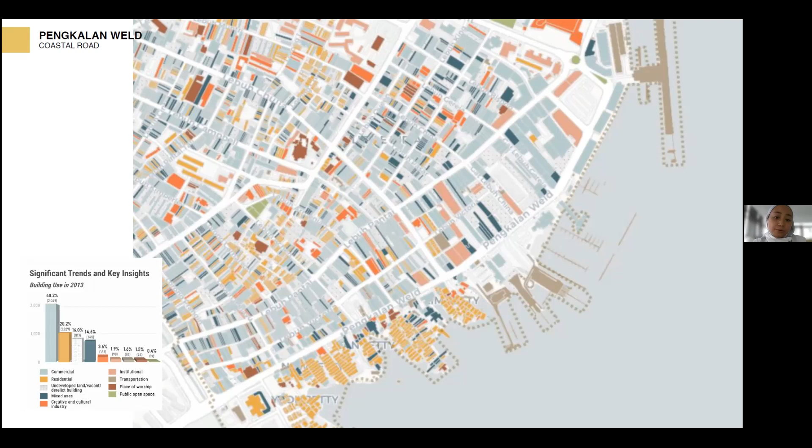From this understanding, you have to know the sort of activities that will be around this road or along this road. With that, you can understand the dynamics of the site, who are the people that will mostly be walking or engaging with the site, the road, or the environment.

Some of my observations through Google Street. When I look at this coastal roadway, it's a 2-lane road and quite wide. The cars are usually fast, so we can say it's actually a car-dominated area where the pedestrian walkway is not very well treated. There are pedestrian walkways, but they're not conducive, safe, or even shaded by trees to make it comfortable for people to walk.

This is what's interesting at the public building of Suruhanjaya Pelabuhan Pulau Pinang - there's street art where they've put this all over the town. It's interesting, but it's just an attraction, not really something you can engage with. I mean, you can read it, but it's not really engageable. So that's some of the character observation I've seen through this road.

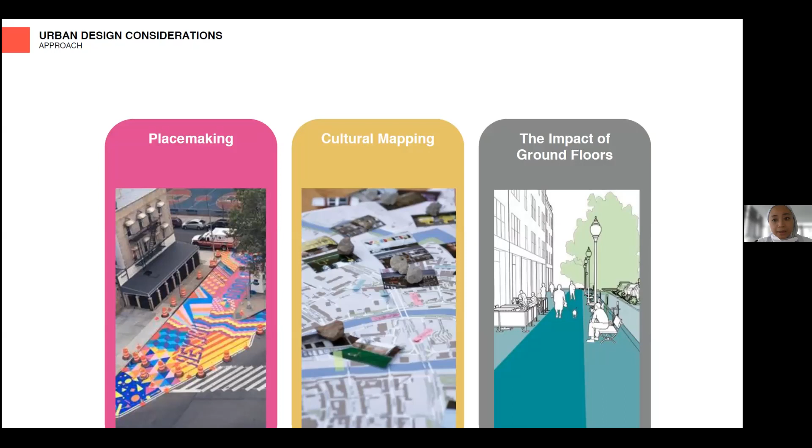For my presentation, I'll be talking about three things: placemaking, cultural mapping, and the impact of ground floors. For placemaking, we need to ensure six principles.

The first is ease of movement, so people can easily access the placemaking area, whether it's a shop, a kiosk, or an art statue - it should be accessible and safe. Then there's character - you need to understand the site in order to implement what sort of character can be part of this particular placemaking element.

Then there's legibility - it needs to be clear why the purpose of being there, so people know this placemaking is here. And then diversity is quite important, so you can capture a lot of diverse kinds of people that go there - cultural as well as inclusive.

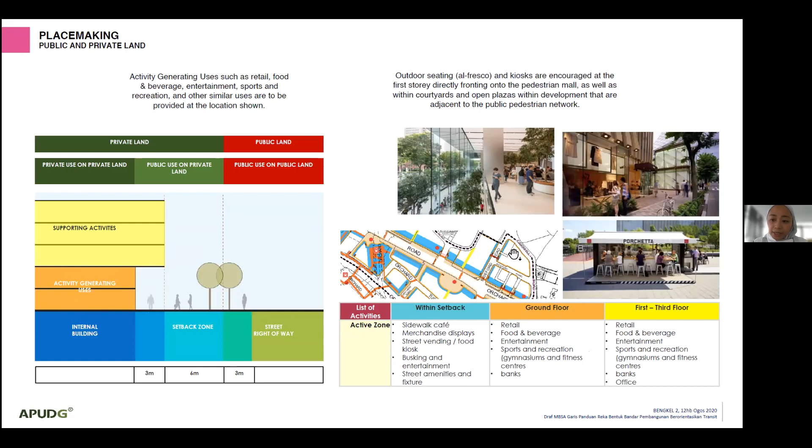This is just another form of saying that these orange demarcations are where the public mostly lingers, and this is what we call activity generating uses to create placemaking.

Another example is in Shah Alam - they create public area, but this is just their easy approach, or not expensive but cheap approach. Sometimes they just want to introduce to the public that they want to make this a public space, so they just want to put cheaper elements first.

We also have to consider the pandemic or endemic times with COVID. With placemaking, you can't really have spaces that can trigger the virus. In Jalan Alor, for example, they spaced the tables out and had divisions between shops. The activity still needs to happen because it's just our lifestyle and culture, however we need to take safety precautions.

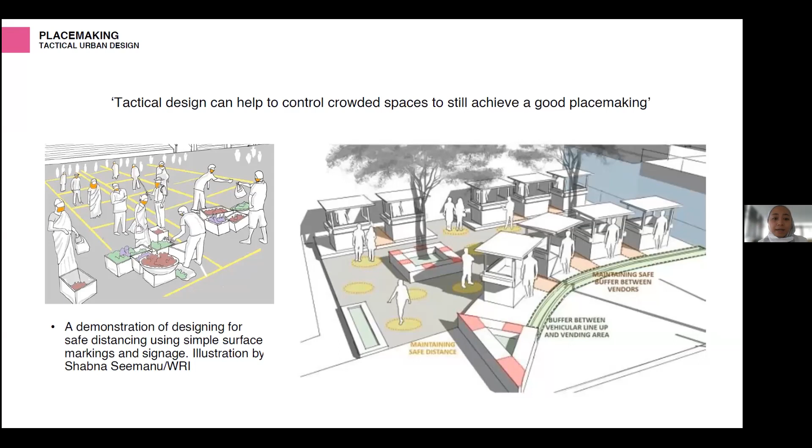For example, something like this, which lets people still socialize but being distanced. And this is an interesting quote: placemaking could start from shared spaces in an office building to a back lane, using art and culture to attract people to have a sense of belonging or a place to relate to.

This is an interesting case study I just did research on in Georgetown itself, Jalan Magazine and Jalan Gurdwara. The municipal city council of Georgetown has actually revitalized a 135-meter long back lane between Jalan Magazine and Jalan Gurdwara.

When they revitalized the back lane, they created different spots of placemaking: areas with green turf on the floor, timber decking with some plants, lights on the ceiling, and it also works as a cycling lane.

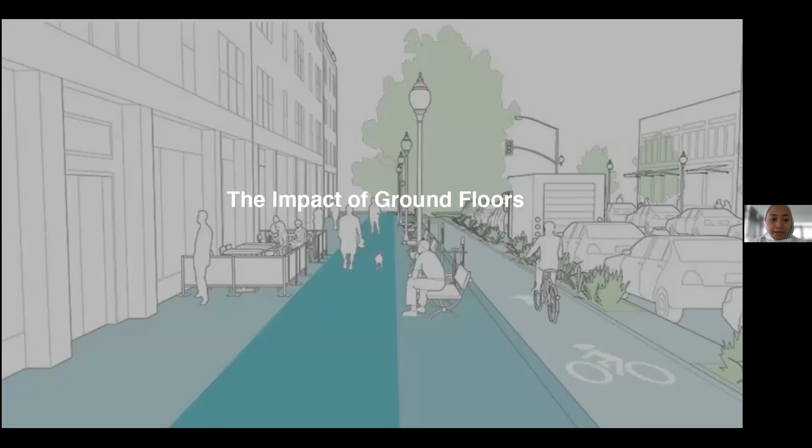These are some pictures that I feel can be part of the culture of Georgetown, where there is a multi-diverse race as well as the built environment that is attractive, combining modern society with the colonial era. The third and last theme I'd like to talk about is the impact of ground floors.

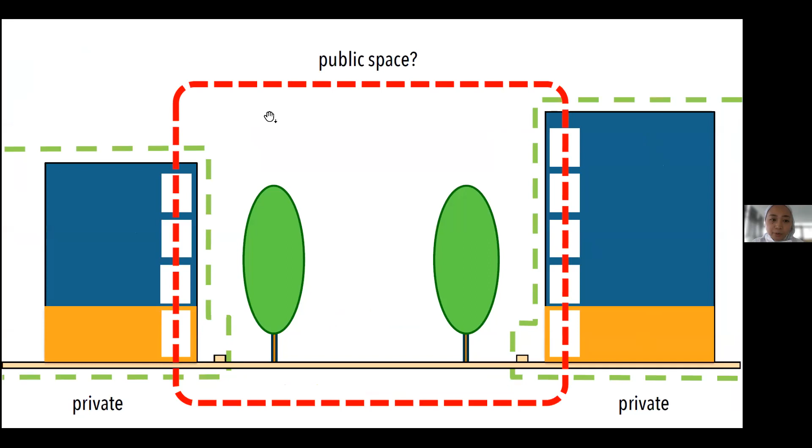So what is a public space, right? When we talk about public space, is it the plaza between the buildings, or is it the whole thing including the frontage of the building facing the plaza?

I think the public space should be the city at eye level, at human scale, where people can access, see, engage, smell or taste. These are the important factors we need to look at.

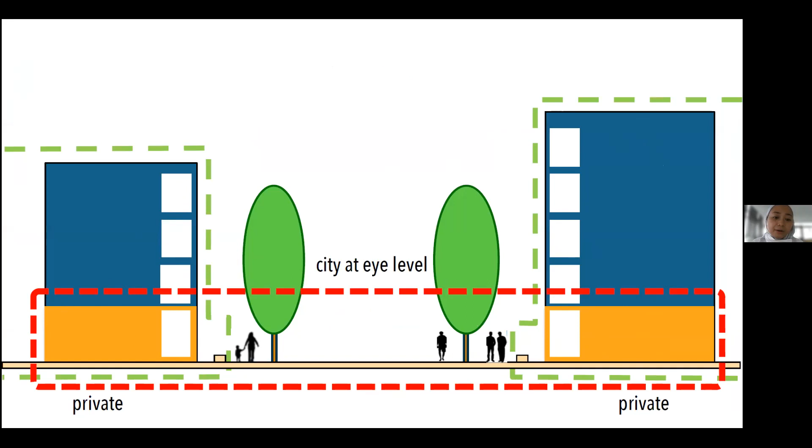When we look at the effective viewing distances, at the 1 meter distance from the shop, this is where the person feels more attracted, at the ground floor. If the person is beyond 1 meter, at 5, 14 and 23 meters, they experience different levels of building heights.

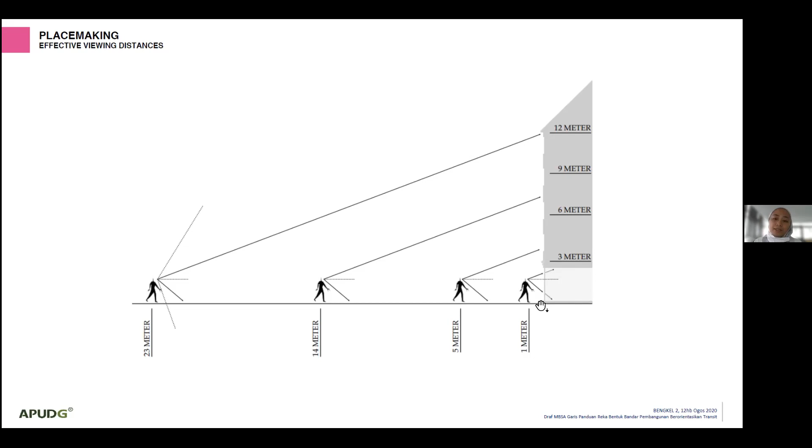But I think in this course, I'm not sure if I'm right, but this is where we want to look at, which is 1 meter, trying to solve this sort of facade. How can it be more attractive and purposeful to the public to enter?

Then it goes to the treatment of the windows. Are the windows giving full advantage to what people or the public can see inside? Even if it's just a straight wall, is it transparent? Is it a full height window or not? Because the window is actually a very important element.

People are attracted to what they want to see and what's inside. According to architect Jan Gehl, above 50% of the building front of the ground floor should be transparent, meaning windows or open space. So that's something we should consider.

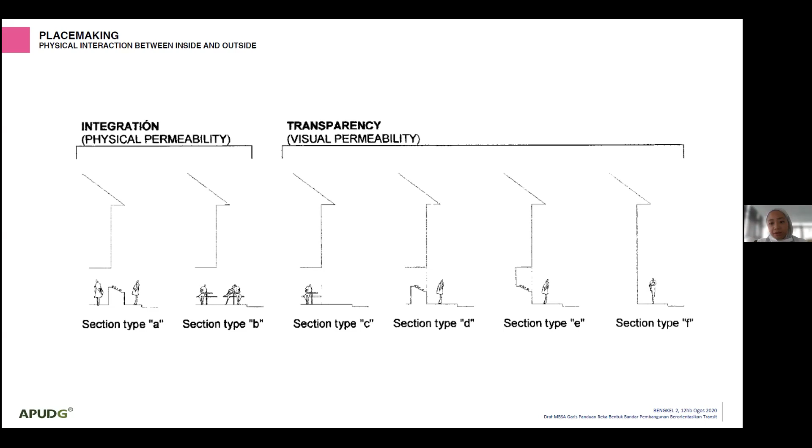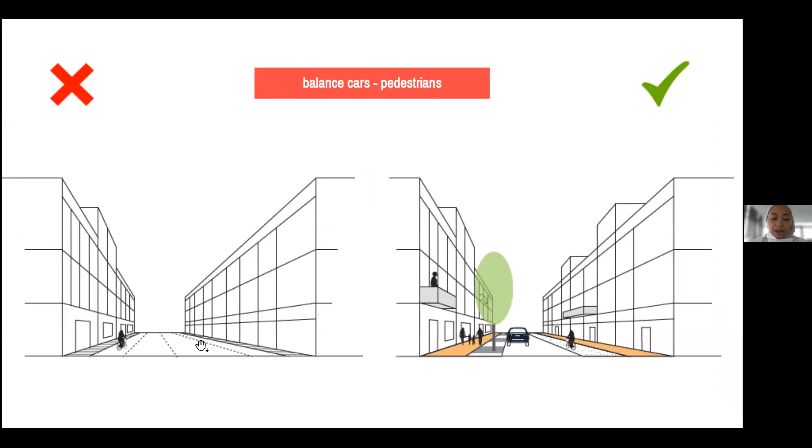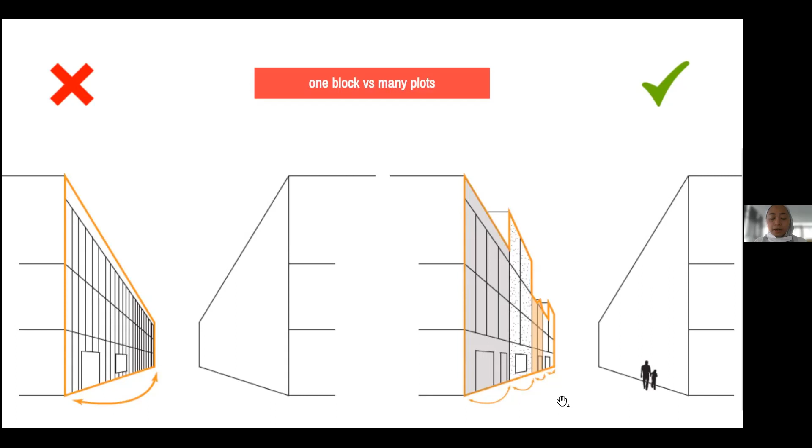And the dynamics of the building height also plays an important role to make people interested to be in that environment. And tree canopies are very important to create that comfortable temperature.

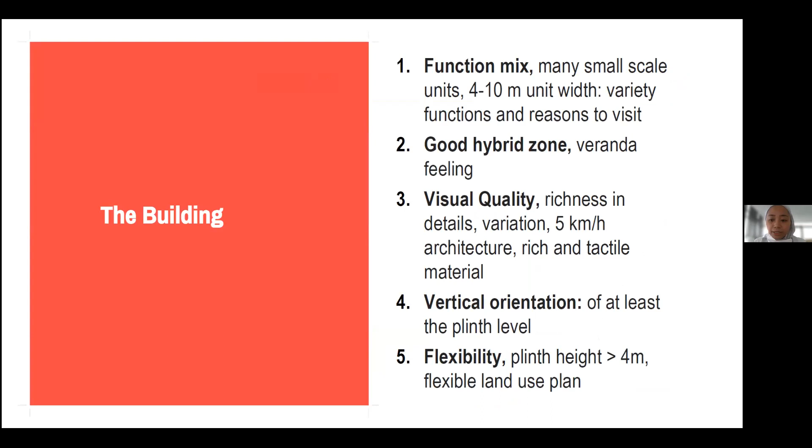As for the building itself, the function mix, many small scale units are better than having a big scale unit. A good hybrid zone, veranda feeling, visual quality, richness in details, vertical orientation of at least the plinth level, and flexibility.

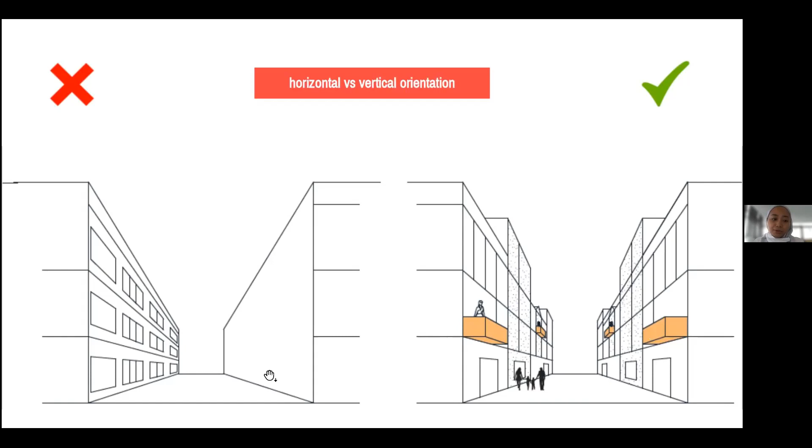So when we look at this building compared to this one, when we have these protrusions out, people would probably want to interact, or it just feels safer to walk when you have people watching, as opposed to walking by a blank wall with nobody looking out.

And then, one entrance versus many units. This building has only one entrance, but this building has many entrances, and it just gives more activities and more reason to walk.

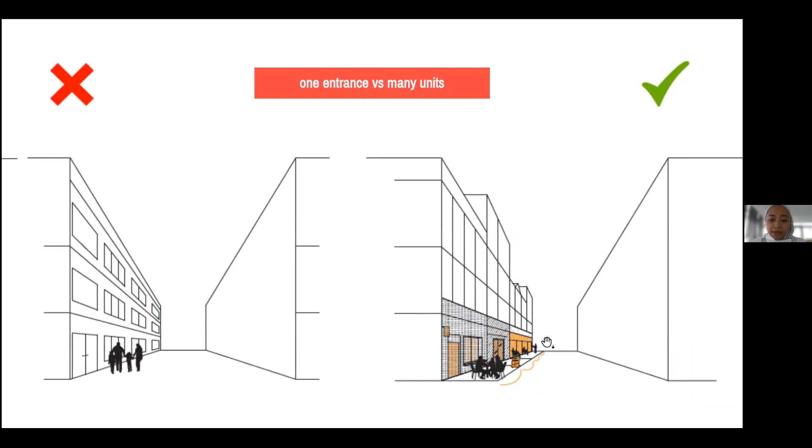As I mentioned, this is blank, and it's a very hostile environment. And this one, even though it's residential, gives off a very interesting environment.

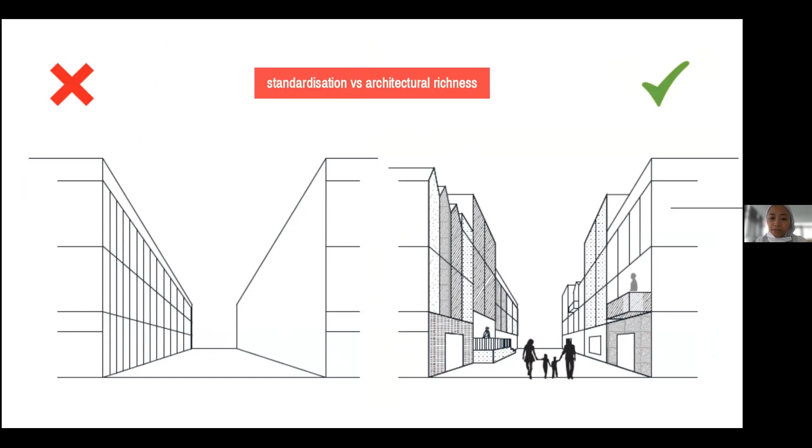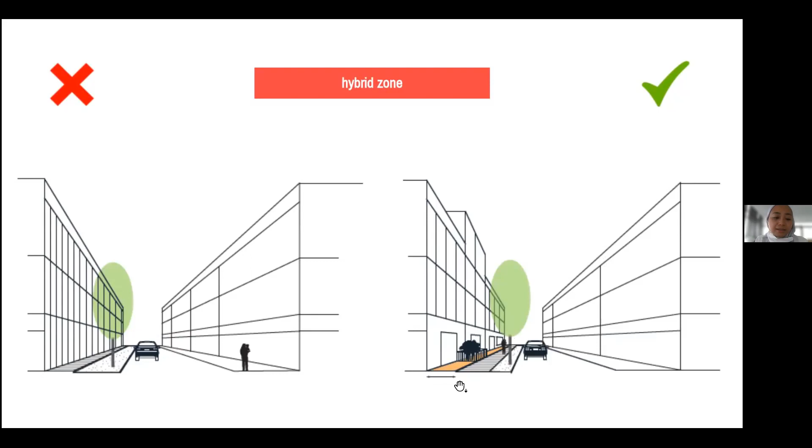And the hybrid zone, in front of the house, where people take ownership of what they want to have, like a plant or something that can add identity to their own space. That's something that's more interesting to walk through as well.

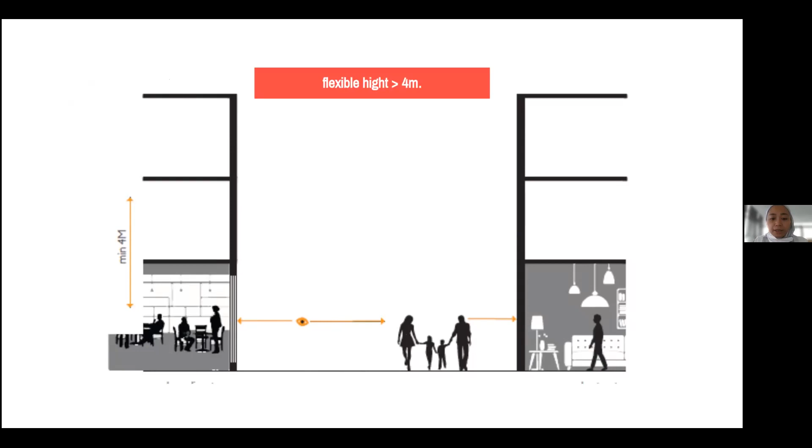And this is the sort of ground floor experience that we want to have, where people can be engaged and see through the ground floor activities. The flexible height should also be 4 meters, which gives that human scale environment.

I guess that's about it. Thank you so much. I hope if you guys have any questions, please feel free to ask now. Thank you.

All right, I guess Raf, you want to read the questions from the chat box? Yeah. Wait.

So there is a question in the chat box which says: what will happen to the placemaking project if people are not using them?

Before even making a placemaking project, we need to engage with the community there, before thinking that people won't even use this space. The purpose of placemaking is to activate the existing area. By activating it, we need to engage with the community, with the shop owner, if situated in front, to get their opinion and have some kind of agreement on whether they can maintain it or serve the people there with food or anything like that. Before a placemaking is built, we need to ensure long-term or short-term activity.